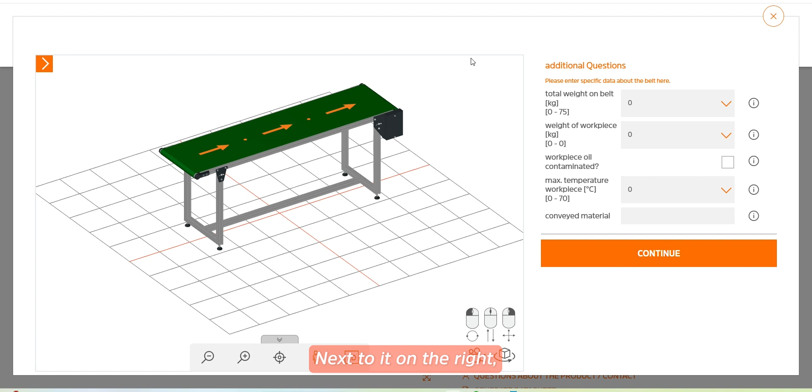Today I will show you our conveyor belt configurator. Our configurator is divided into several sections. On the left you see a detailed 3D preview of your conveyor belt. Next to it, on the right, you can choose from numerous options.

Our 3D view is flexible and adjustable. You can rotate the model with the left mouse button, zoom with the mouse wheel, and move it with the right mouse button. Below, you will find additional options to center the view.

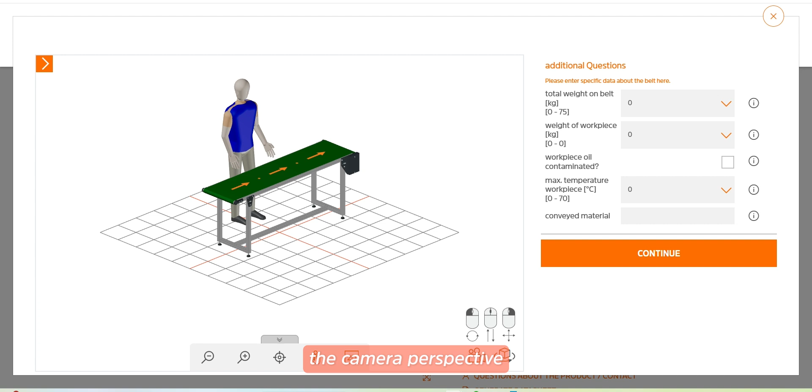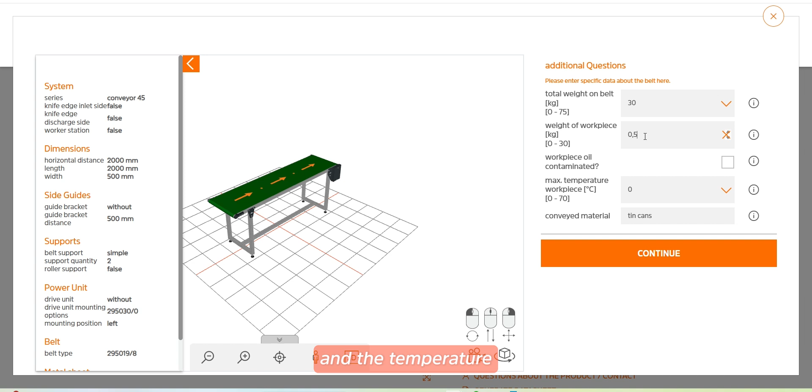The configuration begins with the additional information. Here you provide important details such as the weight of the conveyed goods, the total weight on the belt, and the temperature of the conveyed goods. These details are necessary to create a valid offer and must be confirmed before proceeding.

Next, you select the system. Choose between a 45 or 90 system. The difference is that the 90 system can transport higher loads. Decide whether your conveyor belt needs a knife edge at the inlet or outlet side. The knife edge provides a seamless transition to the system or other conveyor belts.

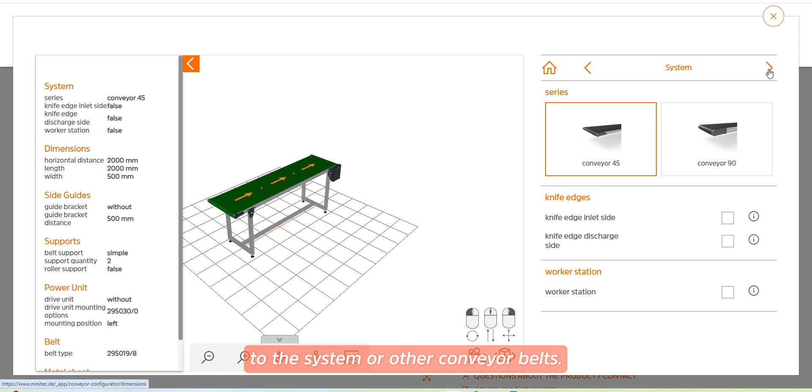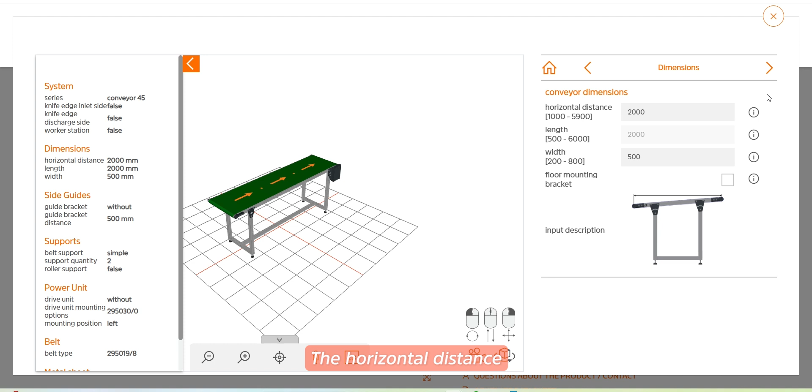You can switch between menu items using the menu arrows. Clicking on the house icon will take you back to the main overview. Now, specify the dimensions in millimeters. The horizontal distance is the space between the two axle points. Each input directly affects the preview. You can also customize the belt width individually.

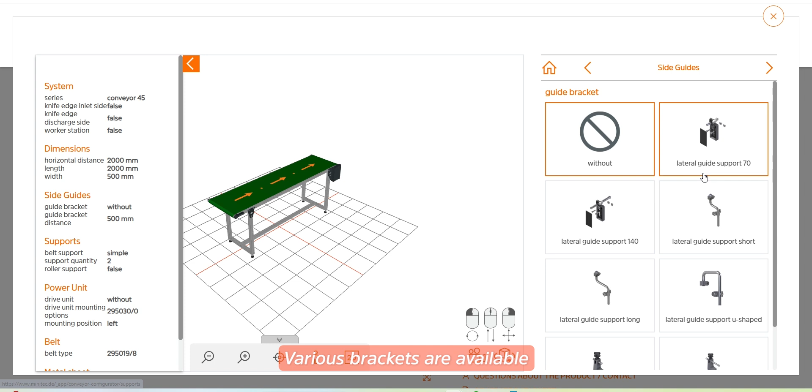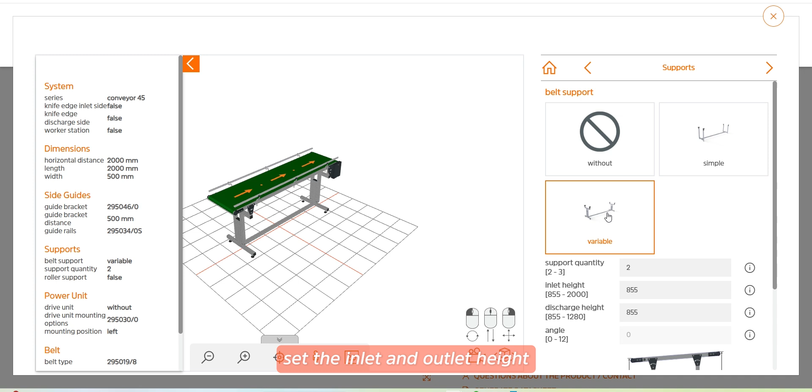Next, select the appropriate side guide. Various brackets are available, as well as a suitable side guide profile for your requirements. Now, choose the supports. You can select no supports, adjustable supports, or standard supports. On this page, set the inlet and outlet height for the conveyor belt. Angles up to 12 degrees can be created.

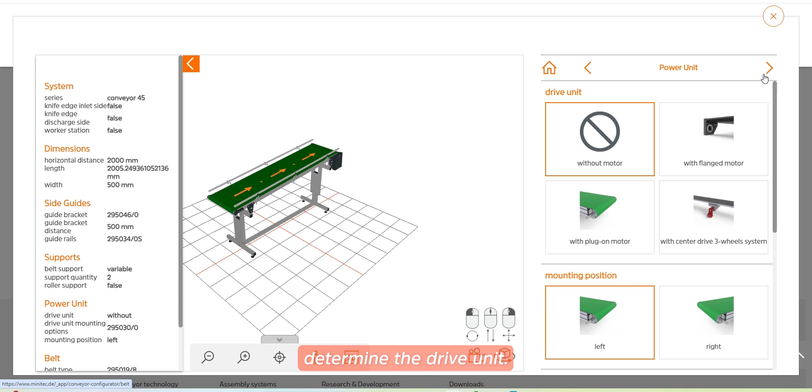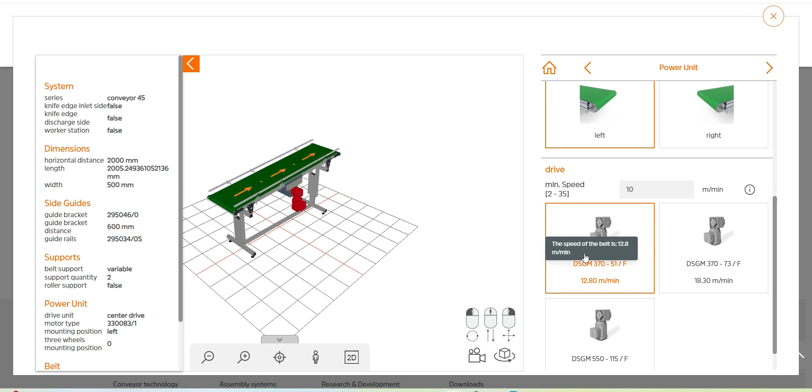In the next step, determine the drive unit. Choose the appropriate motor, mounting position, and filter by the desired belt speed. Now, select the conveyor belt. Choose from different belt types to find the best fit for your application.

As a next step, select the intermediate plate. Options are available in aluminium or stainless steel, with stainless steel suitable for higher loads. Finally, you have the option to add personal notes. If you have special requirements or comments, you can record them here.

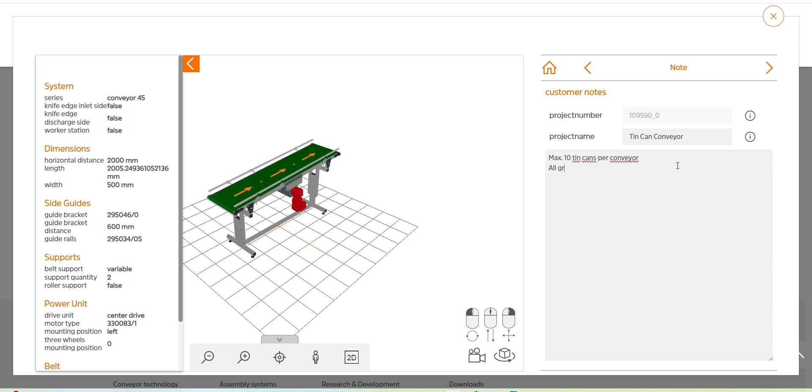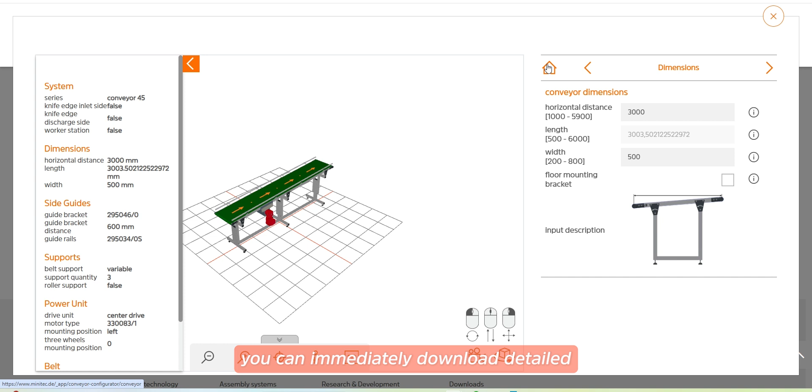You can change your selection at any time, as the system adapts accordingly. For example, if we change the horizontal distance, you will be informed that the roller support for the conveyor belt must be installed for this configuration. Once you have completed your configuration, you can immediately download a detailed product datasheet. Your configuration can then be saved in the inquiry list via bookmark.

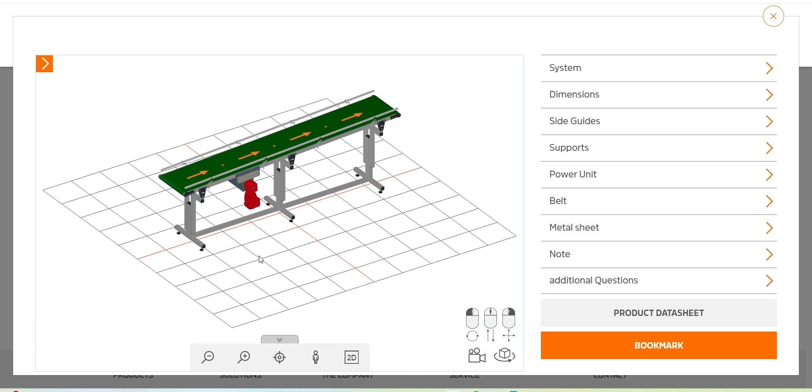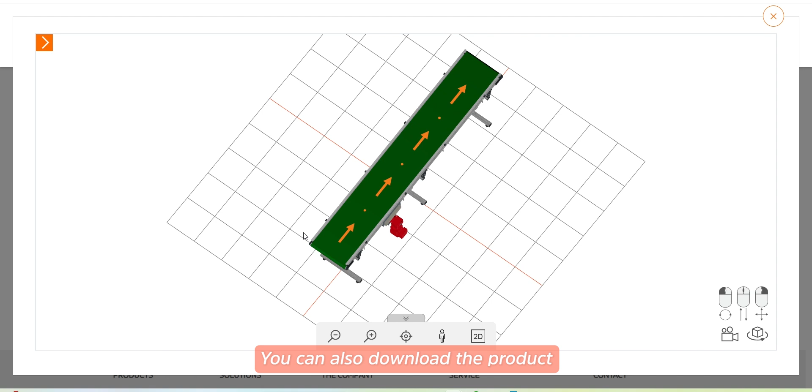In the inquiry list, you can duplicate and edit your configuration. By clicking Open Configuration, you will see a 3D preview of your conveyor belt. You can also download the product datasheet anytime as a PDF via Configuration as PDF.

If everything is correct, click Next and then Request Article. You will receive a quote for your conveyor belt shortly. A confirmation email with all relevant data will be sent to you. Additionally, you can also view all your inquiries anytime in your user account under the history.

Our conveyor belt configurator saves time and offers maximum flexibility.